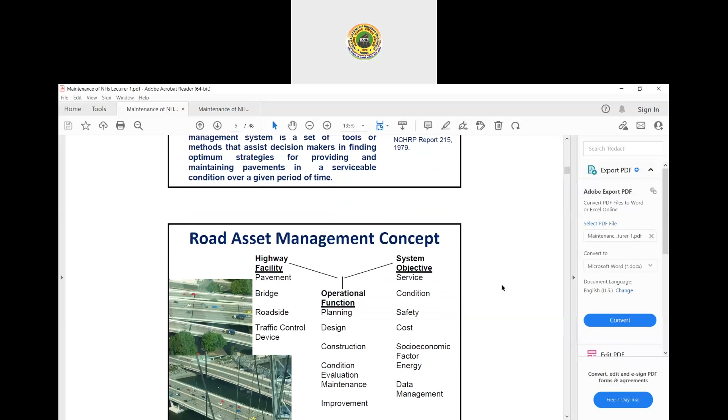So these are the highway facilities which are maintained. It includes the pavements, bridges, roadside elements, and highway traffic control devices. There are four main components of any highway system or facility, and all these four components should be maintained, with some operational functionality for all these facilities.

It will require planning, design, construction, condition evaluation, maintenance, and improvement or upgradation of any facility to meet the increasing demands of the services. And for this, you need to adopt the service objective.

What is the service objective? It depends upon the level of service, the condition of the assets, safety requirements. Cost is obviously a very important criteria to decide how much the upgradation, service addition, or maintenance levels should be maintained. And there are some socio-economic factors or benefits of the facility accrued on account of the maintained facility.

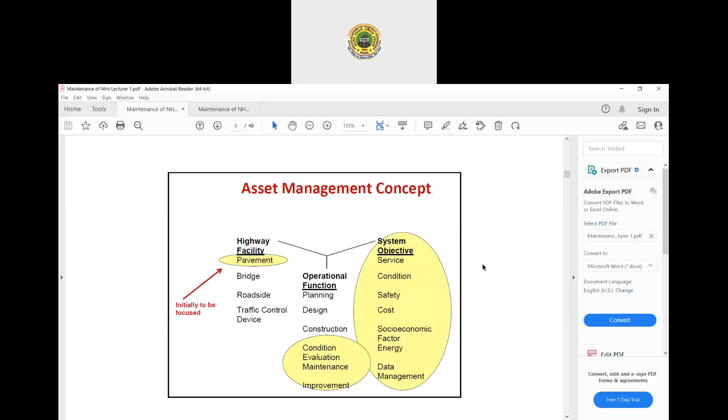For any asset management system, there are some essential components, and these are part of a good management system. It includes the location or asset reference, the data collection devices, preparing the databases, and tools or processing units to take decisions and implement them through management information.

In this, you will collect location or asset referencing data, asset inventory data, into a centralized database. After maintaining the centralized database, you need to process the collected data and analyze it to conclude decisions through decision matrices, and to take appropriate decisions for maintaining the asset or facility in good condition, depending upon the level of services, importance of the highways, socio-economic requirements, and of course, the availability of funds.

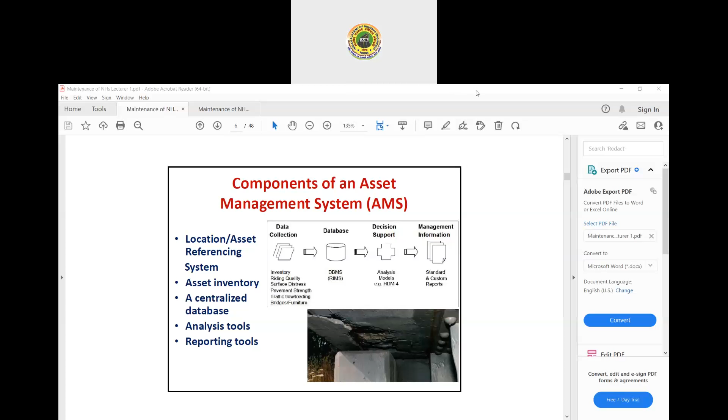This is another pictorial representation of how the data collection will be collected and put into the central database. You need to collect all the data pertaining to the asset inventory system, and also on the basis of the location or asset referencing system, you need to collect all the data.

After collecting the data, you need to analyze or process all the data and then generate reports, either in the form of graphics or along with the GIS mapping system or geotech system, and to take appropriate actions for the maintenance of the assets.

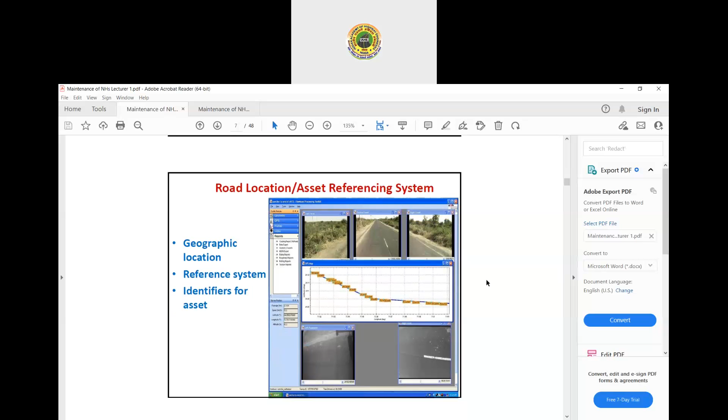In the road location or asset referencing system, you will collect data pertaining to geographic location in terms of latitude or longitude, and through the referencing system, reference them on the basis of the highway numbers, kilometer chainages, or left-right direction of the traffic.

All this data has been collected. In case of bridges, what is the location of the component, the distressed component with respect to the remaining section or remaining structure - all this asset data, for example which part of the bridge or which part of the pavement is affected, should be collected.

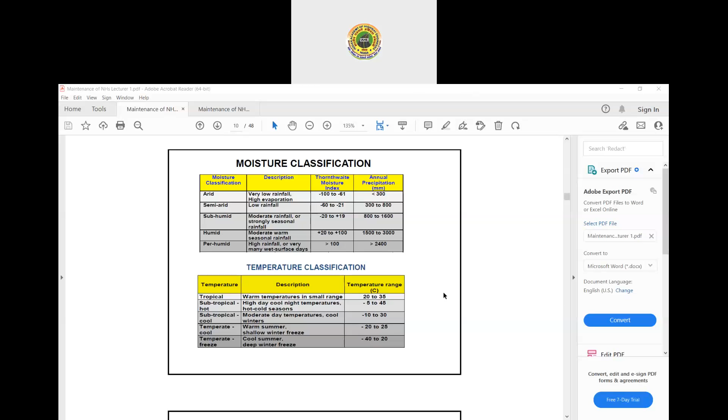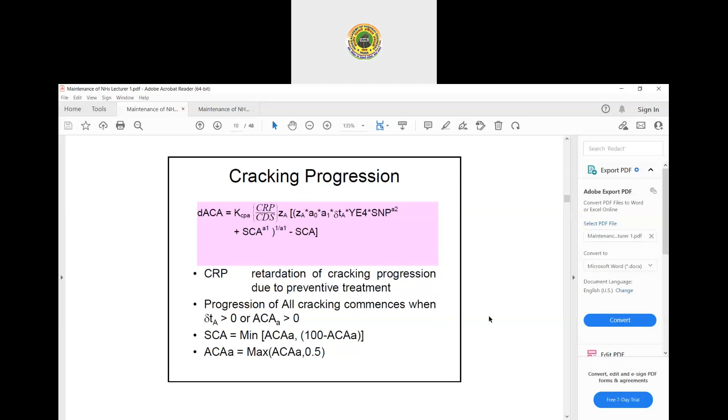Similarly, temperatures are classified as per the temperature range of the site. These are the relationships used in HDM4 to calculate how crack width or its propagation will take place. These details are collected, and once all these details are prepared and provided to the HDM4 modules, you generate reporting modules and present inventory information and analysis results in the form of graphics, tables, or maps. Maps mean condition mapping, either crack mapping or damage mapping, whatever the damage is.

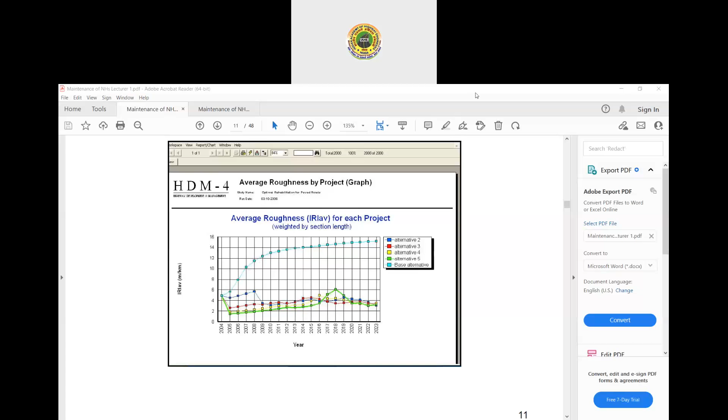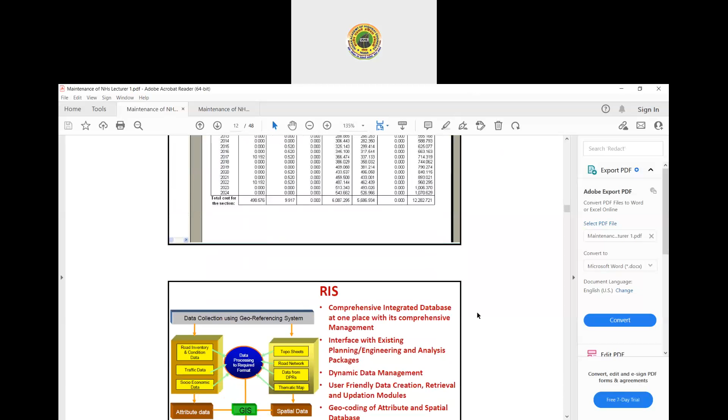I will keep this information, this data, for you to study.

Now we will come to the RIS, Road Information System. This is the data processing for the required format in the road information system. We will collect data from the georeferencing system to gather inventory and condition data. We will also collect traffic data, and socio-economic data is also collected, with all this data processed through GIS tagging systems.

Besides all this data, we also need to collect topo sheets, road network systems data, DPR data from the past, or thematic map data. All this data should be collected and processed to analyze, and thereafter we prepare the maintenance strategy to work out the maintenance treatment and select the maintenance techniques. All these exercises should be done with a single objective: to keep our facility in good condition.

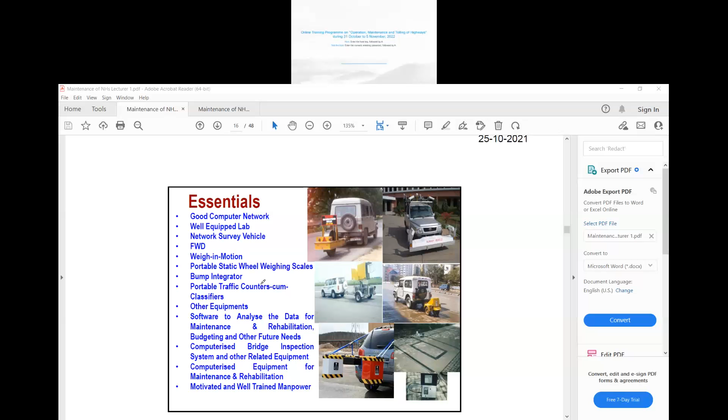Portable traffic counters-cum-classifiers, other equipment, software to analyze the data for maintenance and rehabilitation, budgeting and other future needs, computerized bridge inspection system and other related equipment, computerized equipment for maintenance and rehabilitation, and motivated and well-trained manpower to accomplish all these activities, without which we cannot complete or achieve the goals of the asset management system. All these essentials should be in possession to carry out or to complete the process of the asset management system.

For enhancing the effectiveness of the road management system, you can generate the national data center, having the details of the state capital data center, in which the data should be collected from the district data centers and then taluka data centers. In this way, you keep and collect all the data centers starting from the taluka, then district, then state, and come to the national level to have a database for the entire road network in the country.

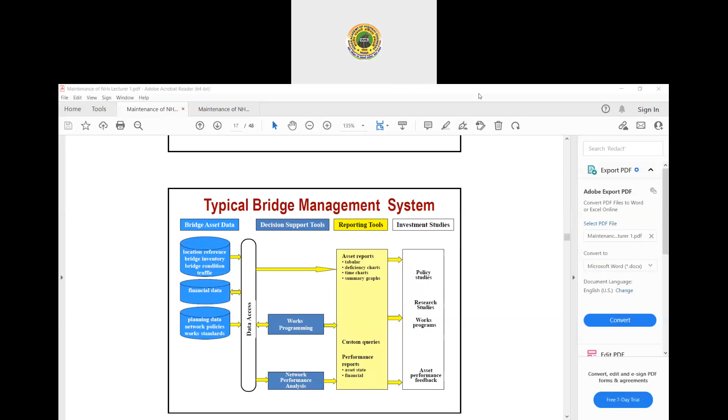So with this, the asset management principles or asset management details are finished. Now let's move to another section of this lecture.

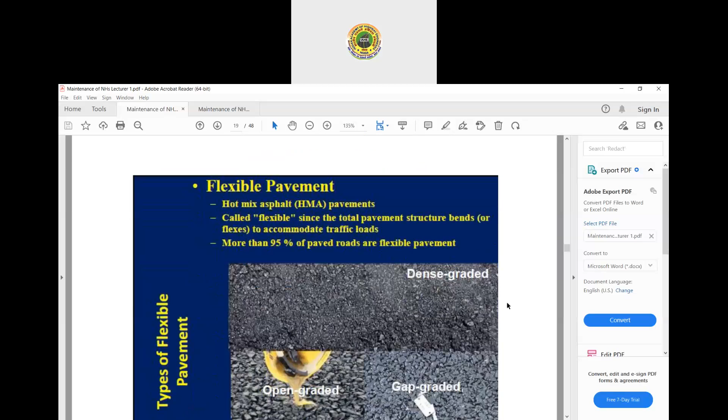Here we will see how the condition survey and rating can be done for flexible pavements. The flexible pavement consists of a subgrade at the bottom, above it a granular subbase layer, above that a base layer, then the bituminous layers. These are the basic composition of any flexible pavement system. One or more layers can be added or deleted from this general composition depending upon the requirements or choice of the designer.

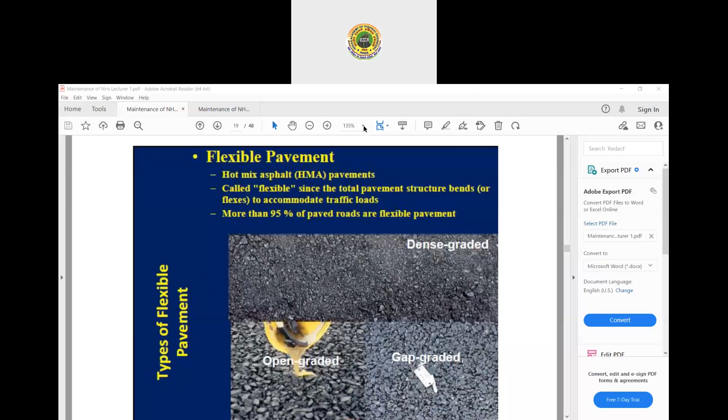Here we are considering only the wearing course. There are three types of wearing course shown in this slide: one is dense graded, another is open graded, third one is gap graded. Generally we adopt dense graded, which includes BC, bituminous concrete, or stone mastic asphalt. Open graded mixes, meaning open graded friction courses or OGFC, are generally not used so far in greater lengths; they are used in very small lengths, and gap graded mixes are also used in very small lengths. So generally we are limiting our scope to these dense graded layers.

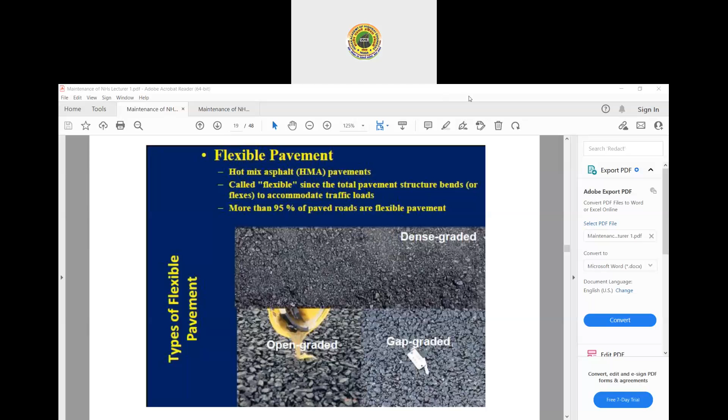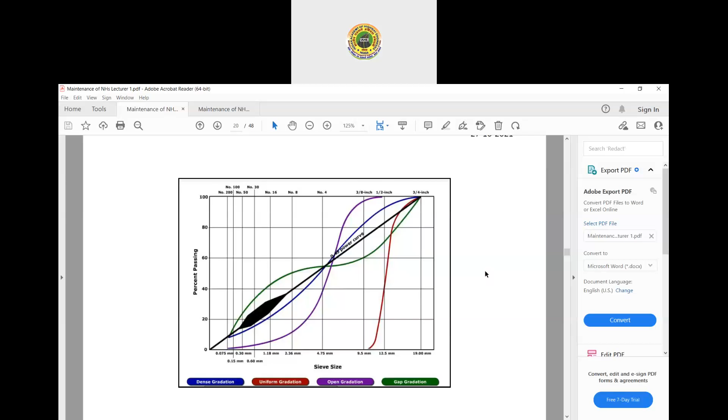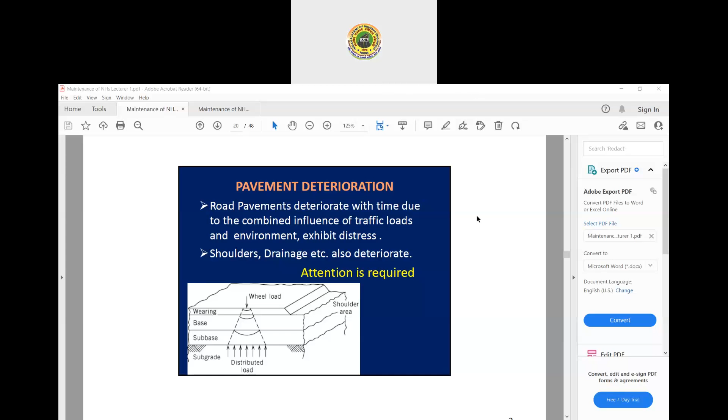As we saw previously at the start of the lecture, the asset will deteriorate with time. So the pavement is also deteriorating with time under the combined influence of traffic loads and the environment. Besides the main carriageway, damage will also take place in the shoulder portion, and there may be damages in the drainage facility of the highway or pavement system. So attention should be given to address all these damages happening either in the main carriageway system, the shoulder, or the drainage facility of the pavement, so that the pavement will not deteriorate further.

Although we have already discussed the benefit, let's discuss here what are the benefits of regular and timely maintenance of pavements.

It will reduce the rate of deterioration and improve the service life or useful life of the road. It will reduce the vehicle operating cost. It will reduce the rate of accidents. It will keep the roads in traffic-worthy condition, workable in all weathers. It will reduce pollution through reduced fuel consumption of vehicles. It can save a lot in the budgetary expenditure of the highway authorities, either in the form of repair, rehabilitation, or reconstruction activities.

If you adopt regular or timely maintenance, it will certainly increase the EIRR by 15 to 20%, depending upon the category of road and traffic volume plying on the road. And obviously, it can defer the demand for further rehabilitation, which otherwise is far more costlier than preventive maintenance.

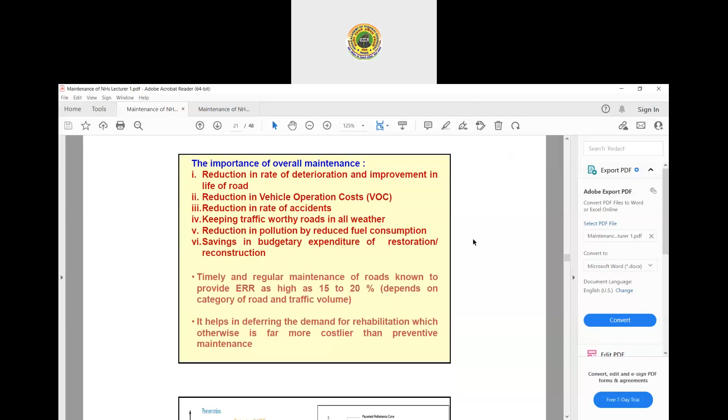This slide we have already discussed at the start of the lecture, so this is just a recap here. Let's skip it.

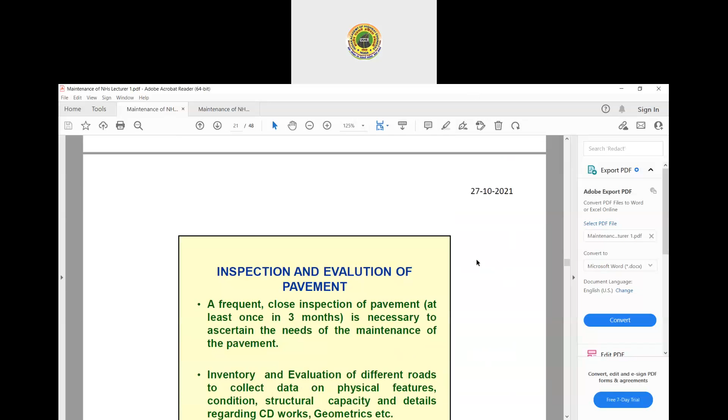Inspection of the pavements: visual inspection of the pavement should be carried out to evaluate the existing condition of the pavements. The frequency should be selected such that at least every 3 months, a close inspection of the pavement is necessary to assess the maintenance needs. Inventory and evaluation of the different roads are essential to collect data on physical features, condition, structural capacity, details regarding CD works, geometrics, etc.

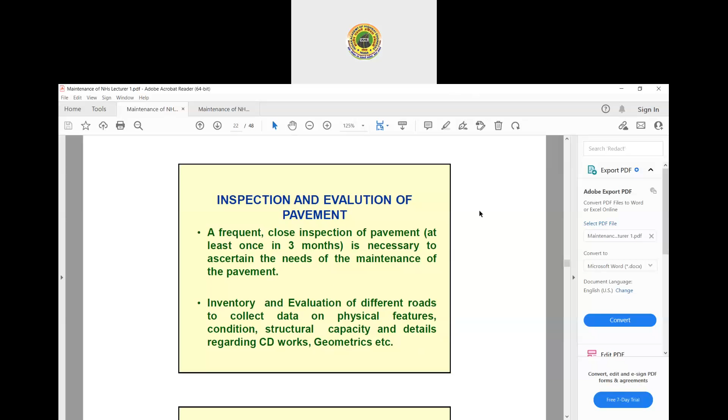So these are the surface defects. They generally do not affect the structural strength or load carrying capability of the pavement, but they certainly affect the functional deficiency. They involve functional deficiencies and cause functional disturbances to road users. Under this category are fatty surfaces and smooth surfaces.

Fatty surfaces is the eruption of bitumen on top of the road surface. Smooth surfaces are generated on account of the polishing of aggregates on the top surface. Streaking, linings, or upheaval will also be generated. Hungry surfaces result when fine aggregates come out from the surface, leaving pores inside the existing surface. These pores in the existing surface allow further deterioration, and sometimes, in the presence of water, may lead to the generation of potholes.

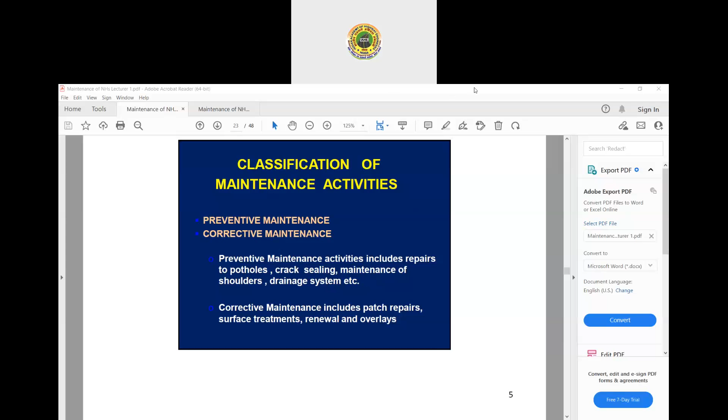Sir, let's take a 50-minute break. Okay, let's take a break. We will meet at around 11:30. Yes sir, yes sir, thank you sir.

As per IRC 82, maintenance operations are classified into three broad categories. One is routine maintenance, which covers items such as filling of potholes, repairing of cracks, and patch works. It is also required for pavement markings on the bituminous surface to guide road users and improve road safety, maintained almost throughout the year.

Preventive maintenance is performed to improve or extend the functional life of the pavement surface while it is in good condition. This may defer the need for periodic maintenance and rehabilitation.

Periodic maintenance includes regular maintenance activities compared to preventive maintenance, such as applying a renewal coat, which is required to be carried out periodically at a specified frequency, or based upon the condition and performance of the road surface depending upon the category of road, traffic, and climatic conditions.

Periodic maintenance also includes activities performed to attend to distresses. When major distresses occur, strengthening is certainly required, and when deterioration of the asset is much more beyond acceptable limits, then reconstruction of the asset will be required.

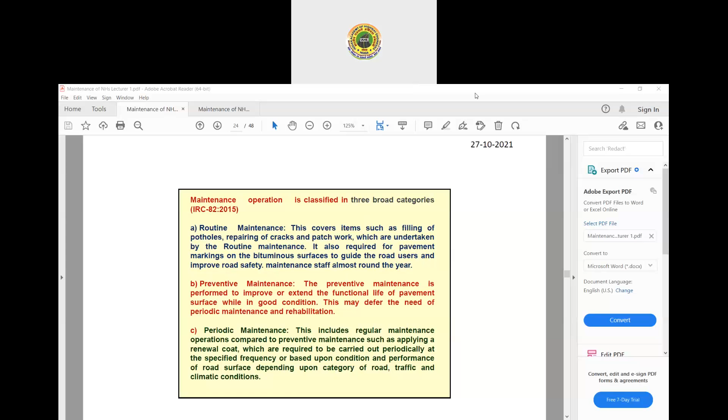Before starting the maintenance process, we need to carry out the pavement condition survey and assess the pavement composition or thickness of the pavement structure.

Then we collect data regarding the shoulder - its dimension, depth, condition - and the riding quality of the pavement, along with the different types of distresses in the form of cracking, deformation, surface distresses, or other disintegration of the pavement.

To measure factors, which give an idea based on visual inspection, are cracking, raveling, potholes, rutting, patching, etc. We also collect details of the roadside drains. So all these details are collected through visual inspection to assess the condition of the existing pavement.

Nowadays MORTH has issued a policy circular for the maintenance of national highways, and under this policy it was mandated that all assessments of pavement conditions should be carried out through the network survey vehicle, on a periodic basis, biannually in a year - first before the monsoon and thereafter after the monsoon.

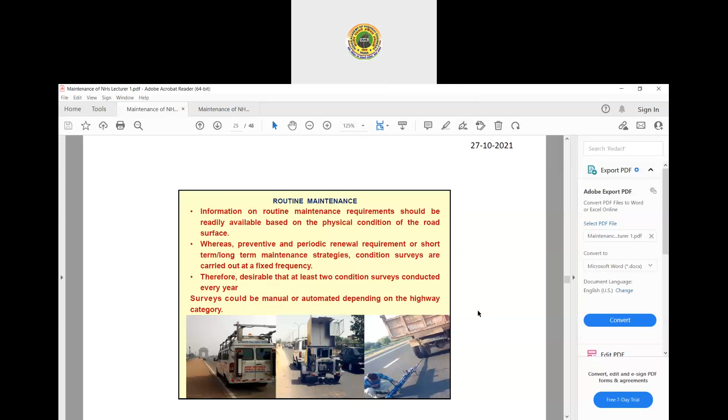Pavement condition is assessed on the basis of visual survey data in which various details of distresses are collected. Before that, the physical distress is identified and a quantitative visual assessment of distress is made by a well-experienced or trained person.

This is done by a team of 3 to 4 people moving in a vehicle at a speed of 8 to 10 km per hour. It means the network survey vehicle's speed is not more than 8 or 10 km per hour, and in this way it collects the details of the various data.

Recording of distresses needs to be done in a proforma already given in IRC 82, which collects information about alligator or fatigue cracking, longitudinal and transverse cracking, bleeding, depression, settlement, potholes, patching, raveling, and rutting.

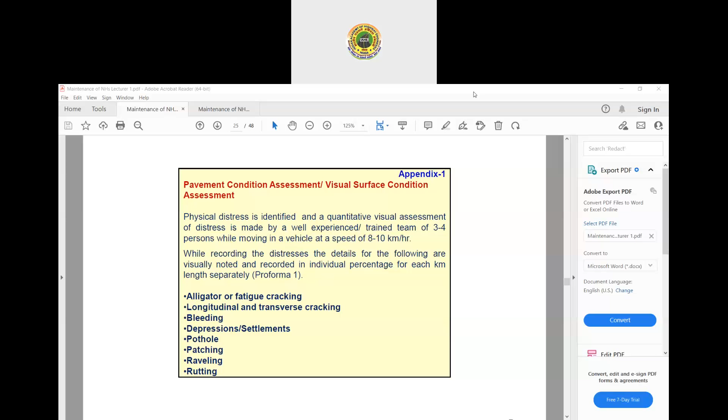Between 1 and 3 mm, you need to assess the condition of the pavement on the basis of the crack length, depth, and location. These three points put together along with the width of the crack will decide the severity of the distress.

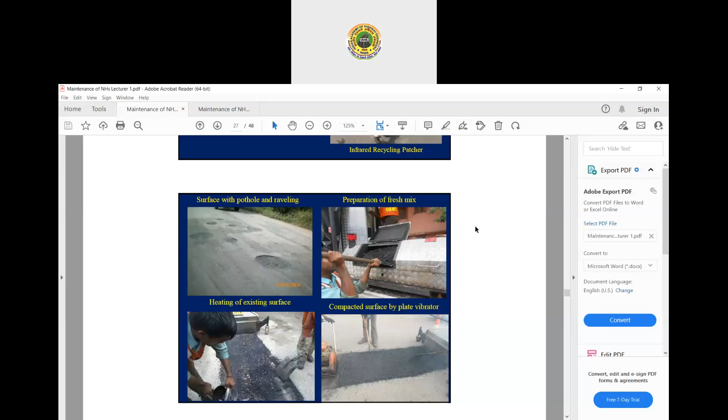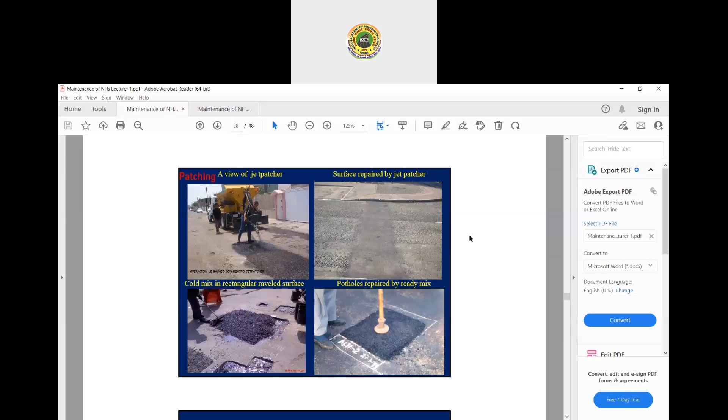Now what is preventive maintenance? Preventive maintenance is a planned maintenance activity which decreases the rate of surface deterioration and extends the service life of bituminous pavement. It is a planned strategy of cost-effective treatment of existing roads that prevents future deterioration and improves the functional condition of the system without contributing to the load carrying capacity of the pavements.

This is one of the important aspects: preventive maintenance is never meant to increase the load carrying capacity of the pavements. It simply addresses functional distress issues to improve the functionality of the pavements. Functionality means smooth road, smooth movement and safe movement, with the objective of safe and smooth movement of road users.

Preventive maintenance is exercised to keep a good road in good condition. It is cost effective when provided on a fair to good condition pavement. You can assemble pavement preventive maintenance, it is nothing but similar to vehicle maintenance, generally happening after 1 or 2 years, as a regular service requirement, just as you put regular service requirements on your vehicle on an annual basis.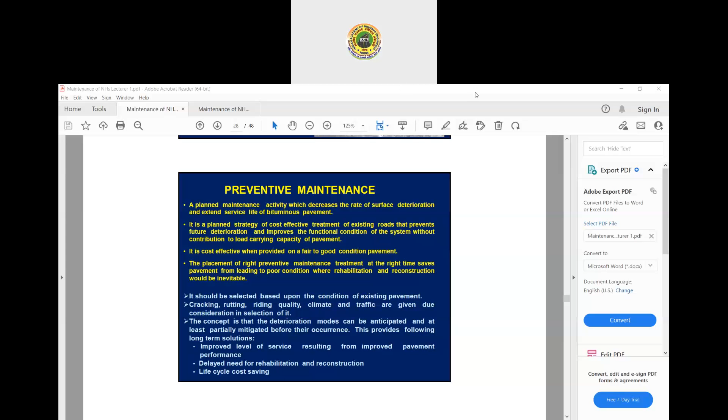The guidelines, meaning IRC 82, are meant to treat existing distresses, to anticipate distresses, or to delay the anticipated distresses or prevent them, to take the appropriate treatment for the existing condition, or to improve the existing condition to a traffic-worthy condition. Timing of the treatment is selected to get the best results and maximize the performance of the pavements after repairing.

Any rehabilitation strategy will comprise identification of the causes of distresses, measurement of distresses, selection of appropriate treatment technique, and timing of the treatment. The treatment may be identified by the following attributes: what is the purpose of the treatment, what is its applicability.

What is the condition of the pavement, what traffic is plying on it, what are the environmental factors influencing the condition of the pavement, what is the surface condition, what are the limitations, what are the construction considerations, what is the expected performance level, and what is the relative cost effectiveness of different treatment techniques. On the basis of all these parameters, you should identify and select the treatment technique.

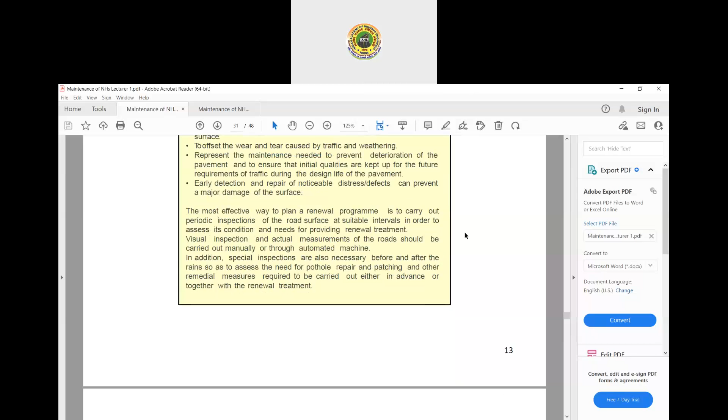Periodic renewal means that the renewal treatment is carried out at a fixed or pre-declared frequency, irrespective of road condition, and is presently not proposed to be renewed. The best way is periodic inspection of the road surface at suitable intervals. Visual inspection and actual measurements should be carried out manually or through automated machines. In addition, special inspections are necessary before and after rain.

For different practices of the treatments: IRC 14 for OGPC (open graded premix carpet), IRC 110 for surface dressing, IRC 111 for dense graded bitumen mixes, SP 78 for micro surfacing mixed surfacing, SP 79 for stone matrix asphalt, SP 81 for slurry seal microsurfacing, and IRC 107 for bituminous mastic wearing courses.

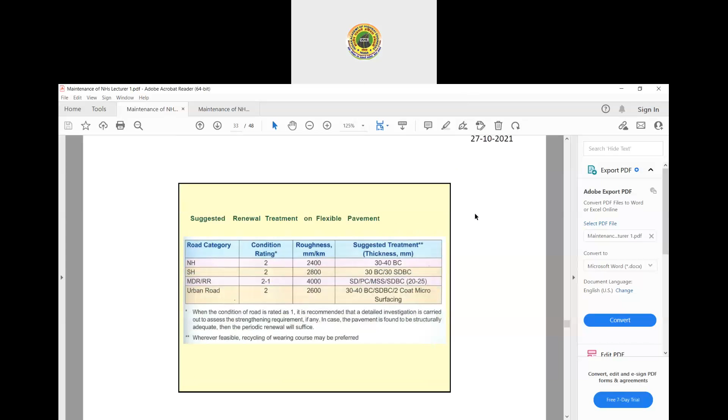This slide gives details about the trigger points which suggest when you will take action to immediately repair and attend to the highway. In case of national highway, if the condition rating is 2 or less, or the roughness is more than 2,400, then immediately we go for renewal and provide a 30 to 40 mm thick bituminous concrete layer over the surface to address the issues. In case of state highway it is similar, but in case of MDR or rural roads, the condition rating may be allowed to deteriorate further, up to a condition rating of 1, or roughness up to 4,000.

For urban roads, the condition rating is 2, but the roughness may go down to 2,600 instead of 2,400 as in case of NH, or 2,800 in case of SH. So you see the difference between these three - national highway, state highway, and urban roads - the difference is only in the roughness requirements. The condition rating will be the same, but the roughness requirements are different.

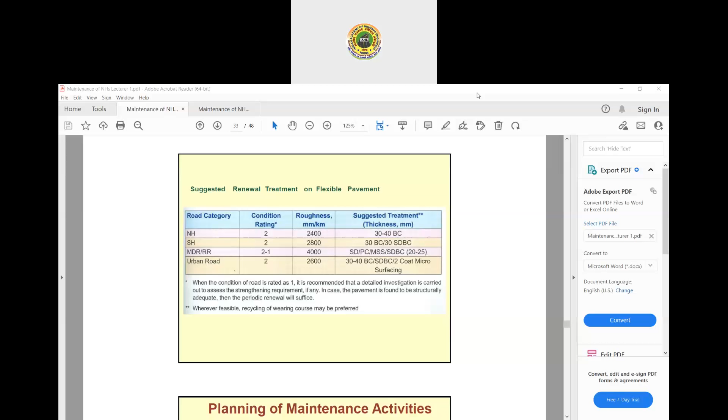So how can you plan the maintenance activities? It depends upon the existing physical condition of the existing pavement surface and the structural capacity of the existing pavement. Pavement condition surveys are carried out either through visual assessment or through testing results.

If you carry out the condition survey through visual assessment, you need to collect all the data mentioned in Appendix 1 and Proforma 1. And if you need actual measurements through testing, you collect the data as per Appendix 2 or Proforma 2, as per IRC 82. The rating of the pavements will be assigned as per the criteria given in the IRC based on the assessed condition of the pavements.

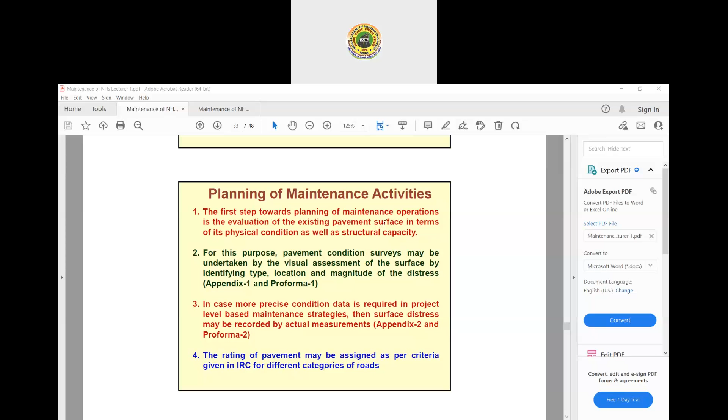These are the proforma given in IRC 82. All these details should be collected. We collect the location, how much surface area is affected by cracks, how much surface area is affected due to patchwork, potholes, bleeding, depressions, edge breaking, ravelling, rut depth, what the rut depth is, and what percentage area is affected for the rating. If there is any issue pertaining to drainage facilities, drainage condition, or surface shoulder condition, these details are also collected and noted down.

Similarly, the actual measurements of the distresses are recorded in Proforma number 2, including the type of crack, its size, and area. Similarly, this exercise is done for patchwork, potholes, bleeding, depression, edge breaking, ravelling, etc., and the depth of rutting is also assessed and noted down.

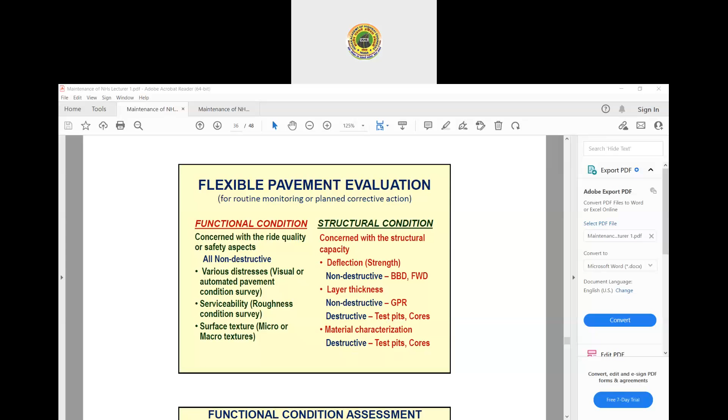So functional condition assessments include surface defects: bleeding, fatty surface, smooth surface, streaking, hungry surface, cracks - hairline, alligator, longitudinal, transverse, edge cracking, shrinkage, reflection. Rutting, corrugations, shoving, layer slippage, shallow depression, settlement and upheaval. Stripping, loss of aggregates, raveling, potholes, edge breaking - all these details have been collected.

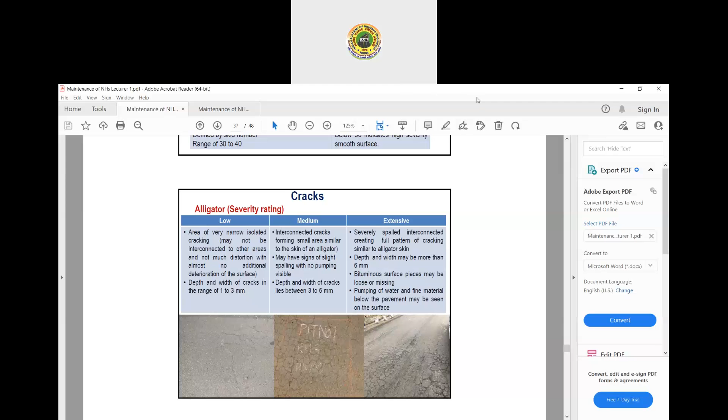Similarly, the severity level can be defined for longitudinal cracking: width in the range of 1 to 3 mm is low severity, 3 to 6 mm is medium severity, and more than 6 mm is high severity.

On the basis of the severity level, you think about the treatment technique and select it accordingly. In case of high severity, you not only attend to the cracks but also consider overlays to restore the loss of structural capacity, besides adding to the structural strength of the existing pavement.

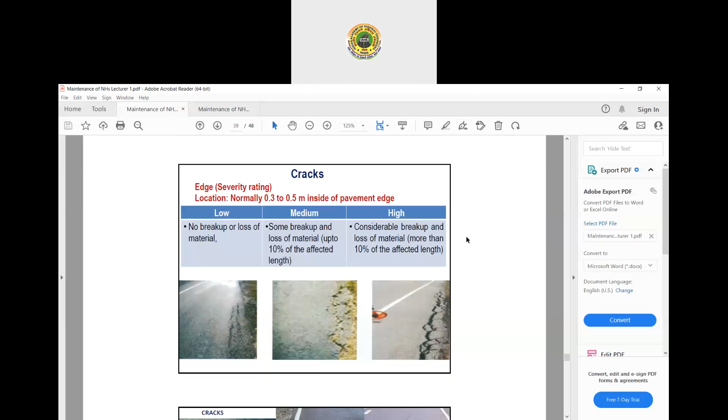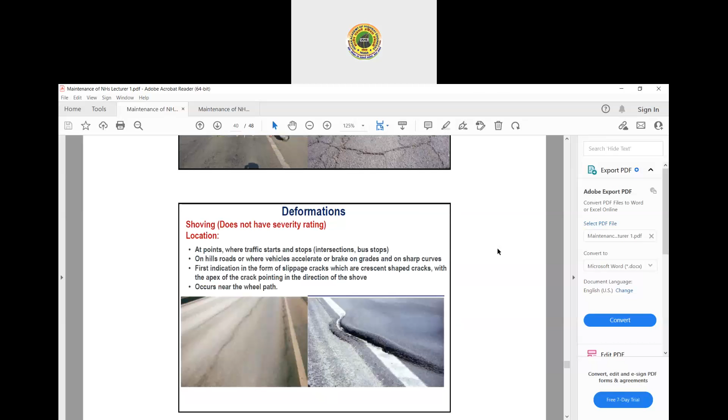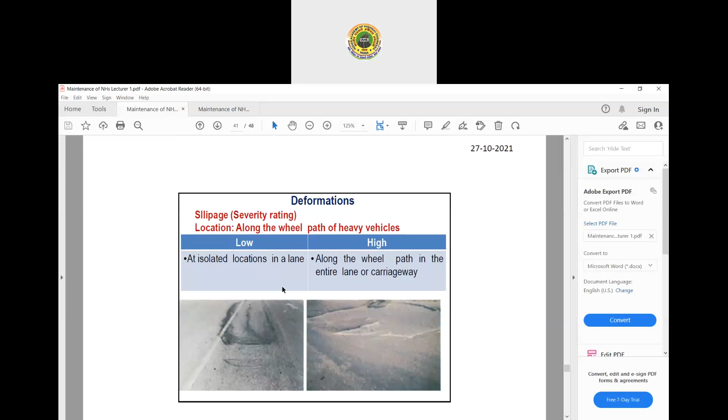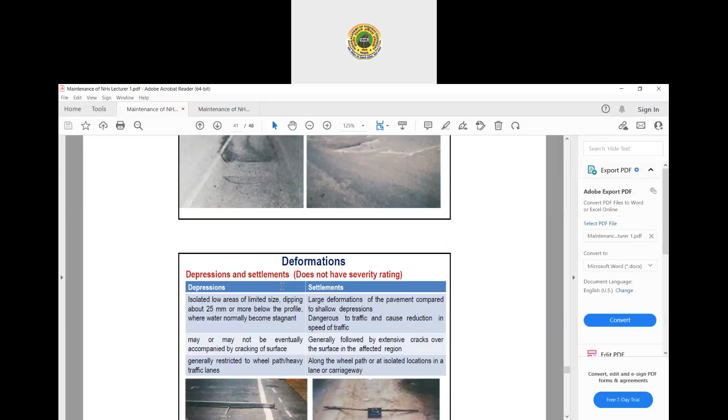These are the pictures showing the shoving. These are the pictures showing the slippage. And these are the pictures showing the settlement and depressions.

Although no severity levels have been defined for these two distresses, certainly if they are not attended to in proper time, they will lead to the generation of severe distress in the form of other associated distresses. So it is a fundamental objective that we will not wait for further deterioration of the pavement. As soon as you notice any distress in your pavement, immediately put in action to promptly attend the distress and repair it, restoring the condition of the pavement to good condition.

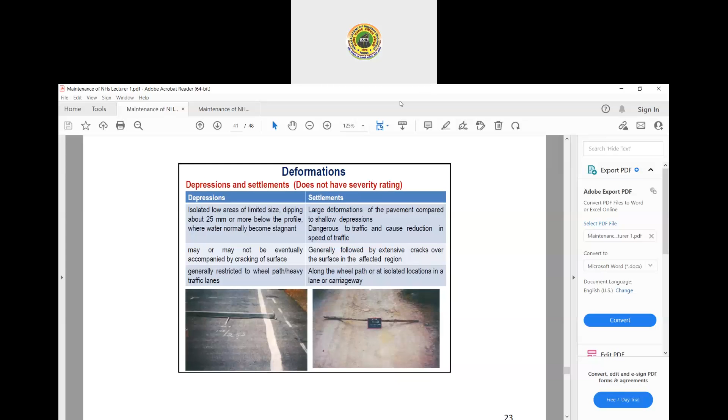So these are the details about the ravelling. Here you will see that if there is some loss of the fines and it is only concentrated to a localized area, then the severity level is low.

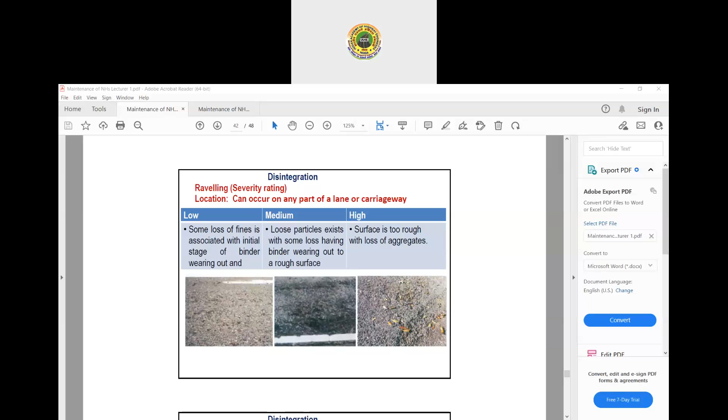For potholes, the severity level is low if the biggest dimension is less than 200 mm. If the depth is more than 25 but less than 50 mm, and the bigger dimension is less than 500 mm, then the severity level is medium. The severity level is said to be high if the depth of the pothole is greater than 50 mm and any bigger dimension is more than 500 mm.